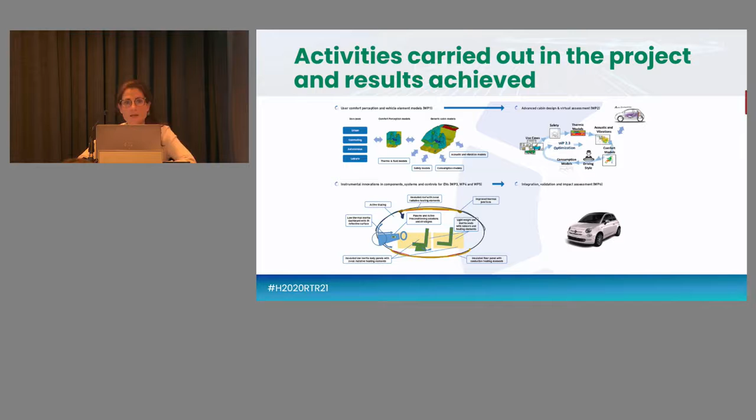So this is just a general overview of the structure of the project. The first line of the project was more centered in the virtual arena. The first step that we took was to develop 3D and 1D models, as well as safety, consumption, and comfort models in order to integrate them all in a virtual environment and be able to come up with different cabin designs, and also to evaluate these interventions in terms of comfort, safety, and energy efficiency. The second line that you can see on the bottom of the slide was more focused on a physical environment. We actually designed, built, prototyped, and integrated different hardware components into a Fiat 500e.

So let me show you a video of one of the first tangible results we got for this project, and it has to do with a physical virtual mock-up in full scale that we did during the project. So, let's play.

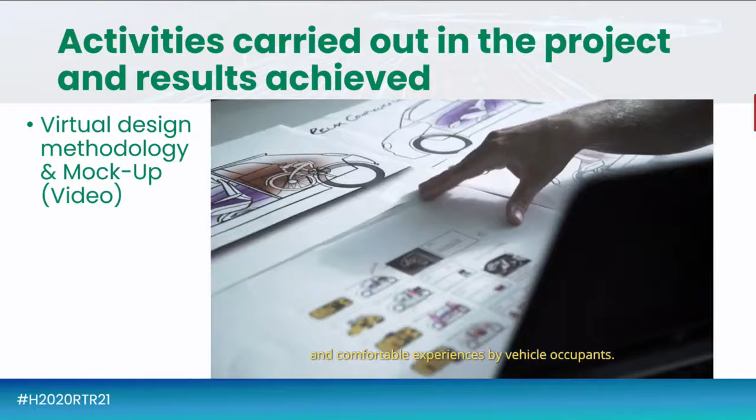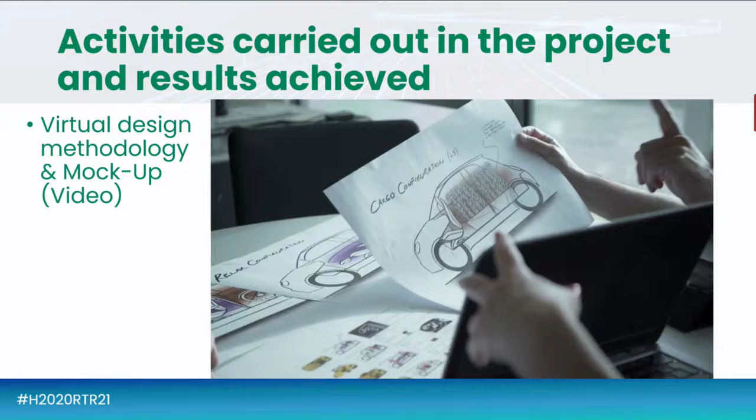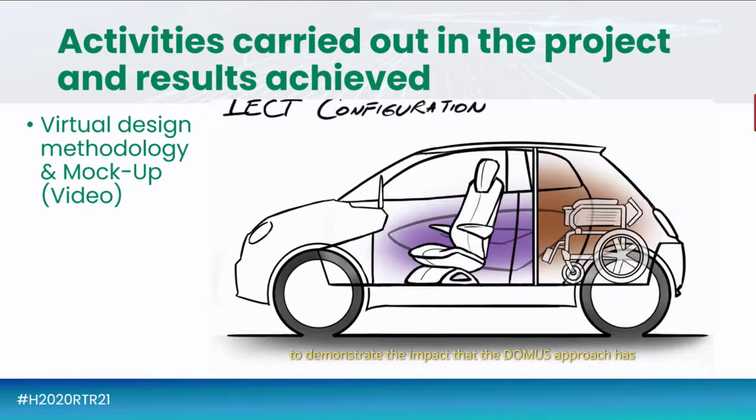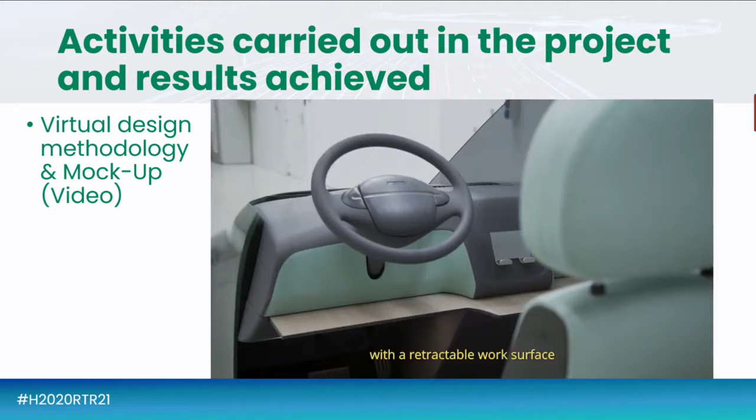Current electric vehicle cabin designs are usually derived from conventional combustion engine vehicles that, having the engine as an abundant source of heat, have not been optimized in a way which enables electric vehicle efficiency demands to be met. DOMUS aims to generate designs of radically innovative, user-centric electric vehicle cabins that could help achieve such sustainability goals while achieving effective, safe, and comfortable experiences for vehicle occupants. As a result, 3 different cabin designs were conceptualized where DOMUS innovative elements were combined with key innovative design modifications. The DOMUS consortium decided to make a mock-up of one of these cabin designs in order to show, in full scale, the results of the design process, to demonstrate the impact that the DOMUS approach has on electric vehicle cabin shapes and layouts when the criteria of energy efficiency and user needs are placed in the center of the process. To this purpose, the vehicle is conceived as being equipped with autonomous driving features, which allow the passenger to either work or rest during the trip. The mock-up was equipped with a single reclining seat with a retractable work surface to accommodate a tablet or a laptop, and the steering wheel itself is foldable, allowing for interior space modulation. The seat is designed to be lighter than customary, while granting a high passive safety level in the reclined position.

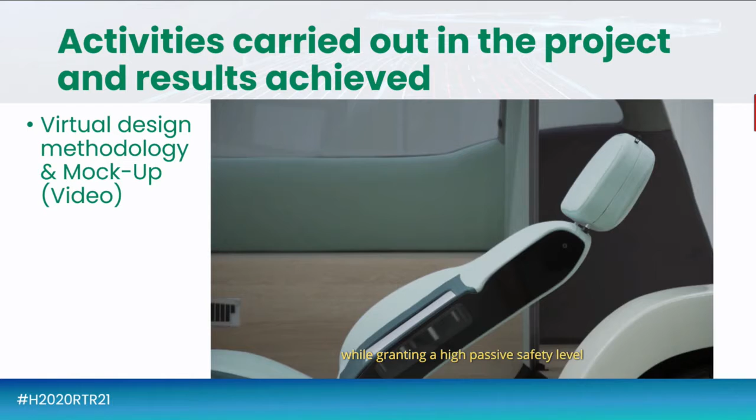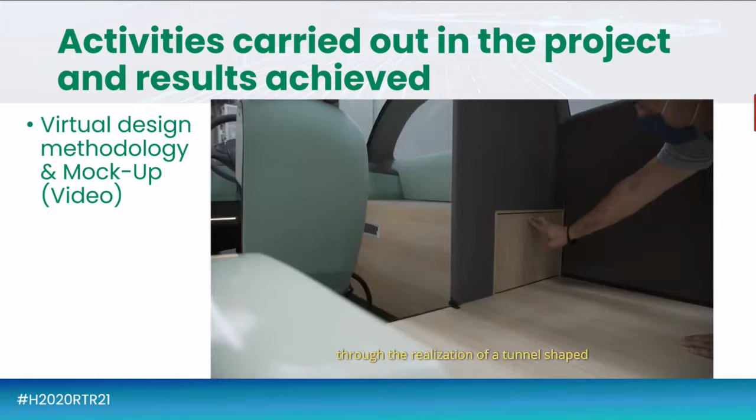A major contribution to the overall passenger compartment volume reduction is gained in a permanent way through the realization of a tunnel-shaped supplementary baggage compartment on the right front side cabin on one hand, and in a reversible way through a removable cabin partition comprised of insulating material on the other.

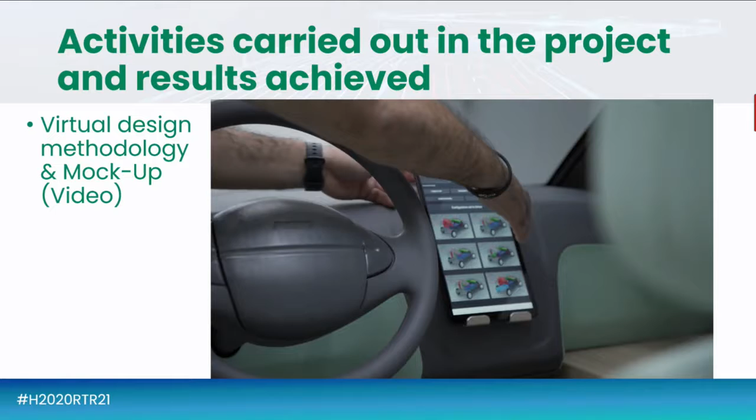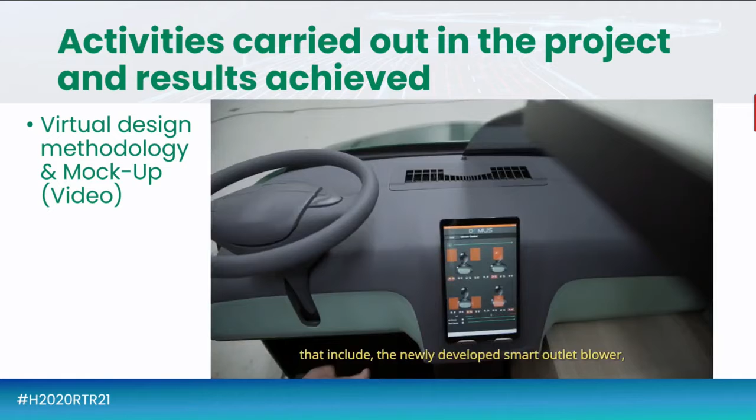Additionally, and to accompany this mock-up, an application was developed in order to control and trigger all the different cabin configurations in an easy, visual and intuitive interface. From this app, not only can the cabin configurations be controlled, but it also enables the user to activate all the climate control options that include the newly developed smart outlet blower and the radiant panels options inside the cabin.

The disruptive design changes of this model allow for a significant weight reduction of the full vehicle, thus contributing to one of the main goals of the DOMUS project.

So that was one video. I have another one. Another main result of this project that I would like to comment on was the result of the great collaboration between Virtual Vehicle and Coventry University. And this main result is the integrated virtual demonstrator that we actually did for the Fiat 500e, the prototype.

What we did for this result is to use the simulation results from a 1D model of the HVAC system and the CFD transient simulation results for the cabin of the baseline vehicle and the cabin with the innovations. And we use a linear regression as machine learning approach to create a fast simulator of the HVAC system and the cabins. They were all integrated in a closed loop that allowed to actually test a simplified control.

Afterwards, the next step that we took was to develop a reinforcement learning controller based also on machine learning. And this controller was used to optimize the performance of the DOMUS cabin in terms of an assessment framework. The assessment framework was a fitness function that we developed at the beginning of the project that considers elements such as comfort, safety, and energy to balance the operation of the cabin.

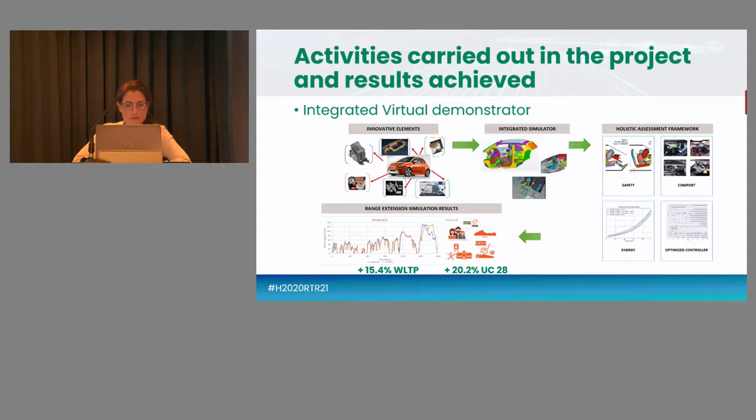And when we ran the simulation considering the WLTP conditions, we were able to increase the driving range of the demo vehicle by 15%. It was also demonstrated that the reinforcement learning controller, based on machine learning approach, performed better than the simple hand-coded controller.

So as I mentioned before, we had a physical, tangible result for this project, which is a demo vehicle in which we integrate all the hardware and software innovations. And I would like to share with you again the last video in which you can actually see the demonstrator.

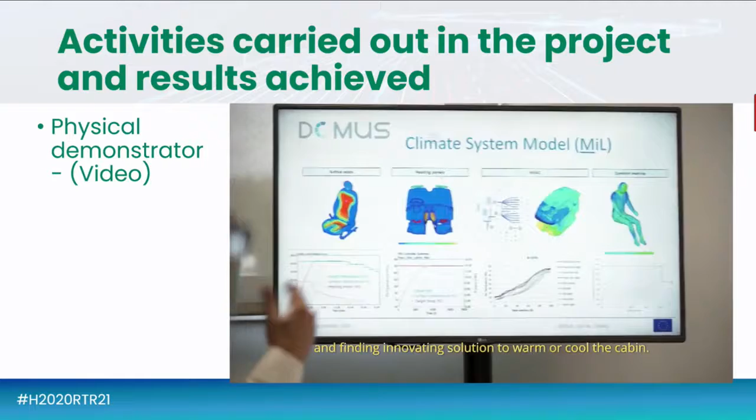Range anxiety is one of the main barriers to electric vehicle adoption by the broader customer pool. DOMUS aims to deliver advanced solutions to significantly lower the energy demand for cabin conditioning by reducing the thermal losses of the cabin, the weight of the car, and finding innovative solutions to warm or cool the cabin. All the innovations developed during the DOMUS project will be integrated in a demo prototype vehicle that will allow the validation of the technologies developed.

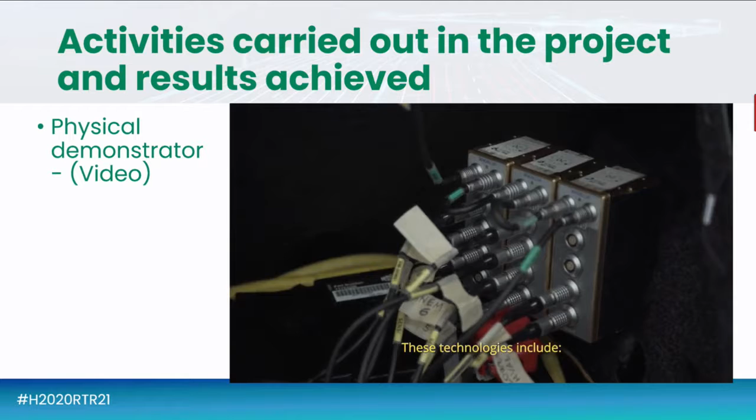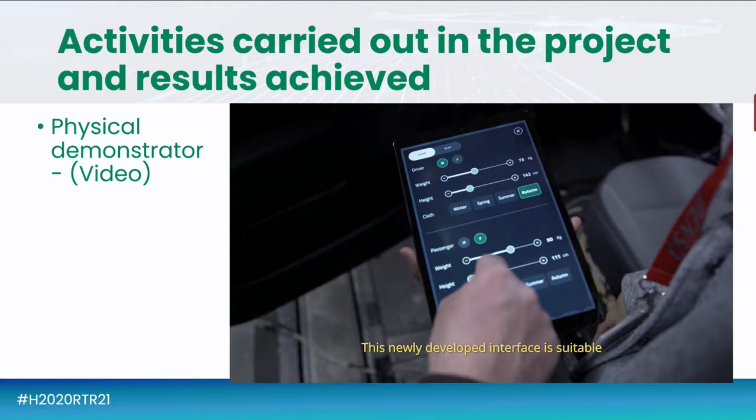These technologies include: Dashboard. The dashboard top cover was modified from the original baseline by changing the materials used in order to reduce the weight. The design was also changed in order to accommodate the human-machine interface developed for the DOMUS project. This newly developed interface is suitable for the operation of the systems, and it displays each component, allowing for an easy, intuitive, and precise control of all the elements.

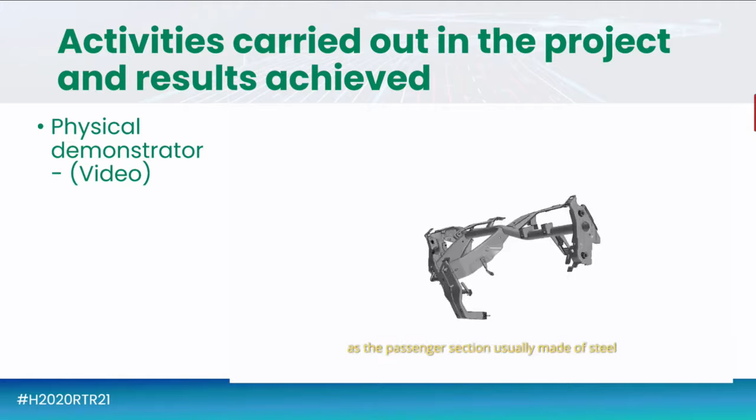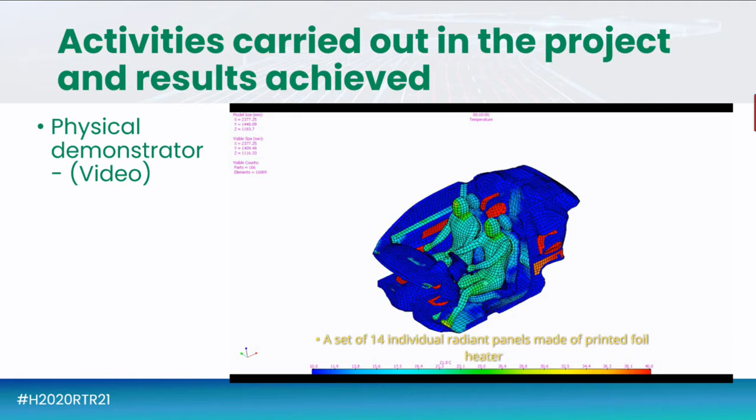The design of the cross-car beam was also modified, as the passenger section, usually made of steel, was substituted with a lightweight material. Radiant panels. A set of 14 individual radiant panels made of printed foil heater have been integrated in the interior components of the vehicle. Active seats. The entire weight of the seat has been reduced by building a high-strength steel frame, low-density foam, and new trim cover material.

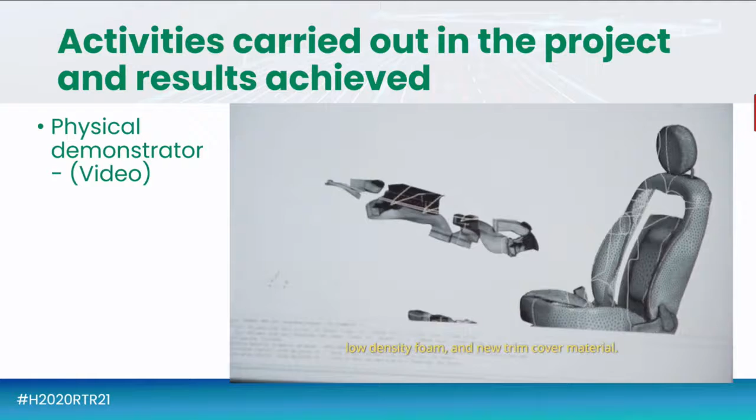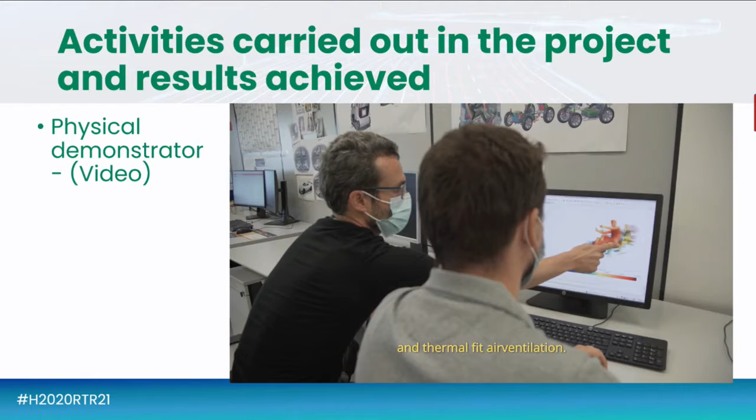There is a heating mat in the cushion and backrest of the front row seats, and a radiant back panel in the passenger and driver seat. Also integrated is a cooling system, consisting of a lightweight fan and thermal fit air ventilation. HVAC unit. The HVAC has been completely redesigned in order to decrease its size and weight, and also to reduce its energy consumption.

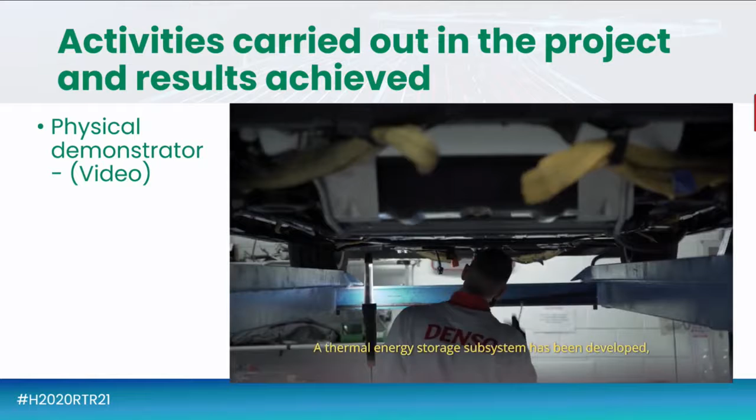TES, Thermal Energy Storage. A thermal energy storage subsystem has been developed. With it, otherwise wasted thermal energy can be captured and stored. This energy can then be used to heat up the cabin.

Insulation panels. The insulating panels were made with phase-changing materials and super insulation materials based on vacuum technology that exhibit very low thermal conductivity and a low density.

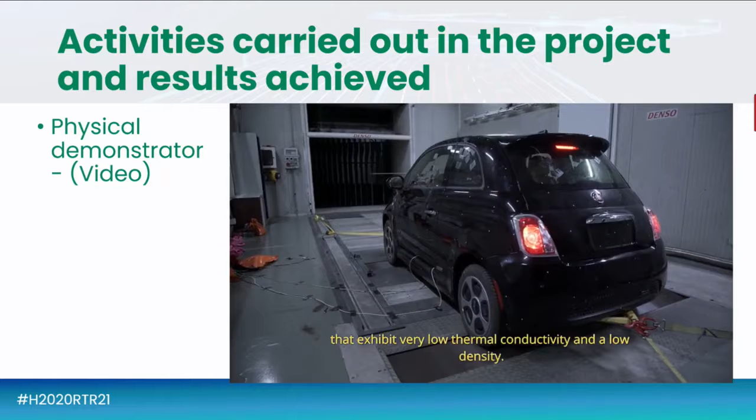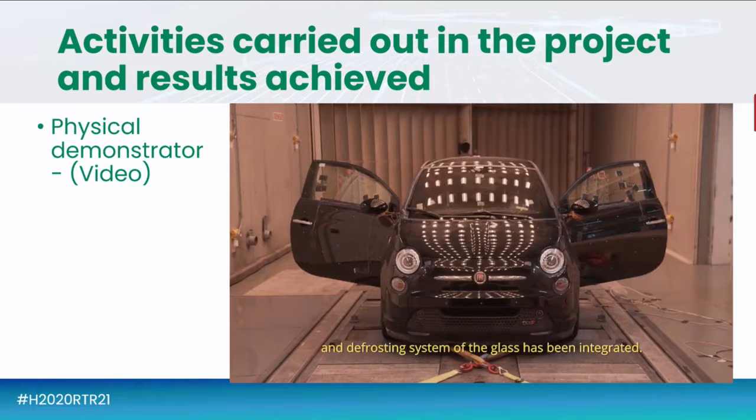Glazing. All glazed surfaces, windshield, rear window and door windows are fitted with electrical heaters and coated with a sun-reflective layer, and an efficient defogging and defrosting system of the glass has been integrated.

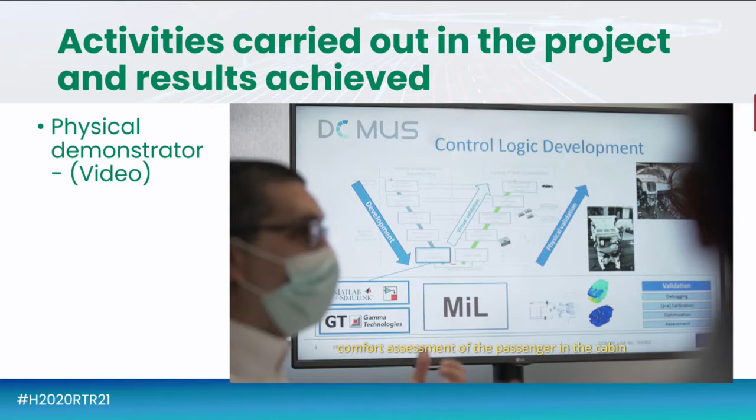Automatic control logic. In order to unleash the full energy-saving potential of these new active components implemented in DOMUS, the project introduces an automatic control logic capable of performing a real-time perceived comfort assessment of the passenger in the cabin and responding by determining the most energy-efficient combination of actuation parameters to all active components in the cabin.

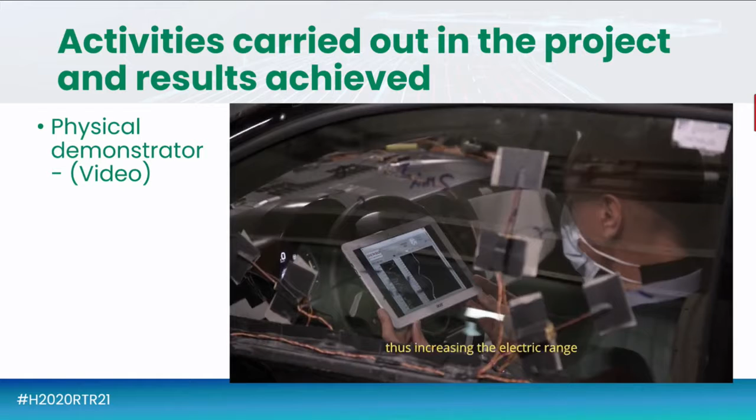All this research and innovations will help DOMUS achieve its main objective of reducing the overall energy consumption of future electric vehicles, thus increasing the electric range in different climatic conditions, while maintaining comfort and ensuring safety.

So once the integration of all these components was completed, we performed testing and validation of the demo vehicle, and we did 3 different types of tests. The first one was acoustic testing, then we also performed WLTP testing in order to assess the energy consumption. We did it at -10, 14 degrees and 35, and we also performed subjective testing.

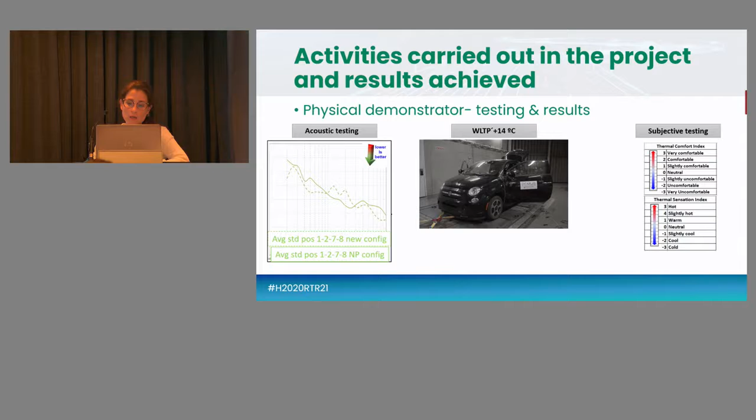So the results of the acoustic testing: we placed a noise source in the side of the car, and in the roof, and also we placed microphones inside of the cabin in order to measure the acoustic intrusion. And in general, what you can see with the discontinuous line is the new configuration of the Fiat 500, that is the DOMUS demo vehicle. In general, the performance was better in the demo car, and that is mainly thanks to the insulation panels created and integrated by Hutchinson. That is another result for another acoustic testing.

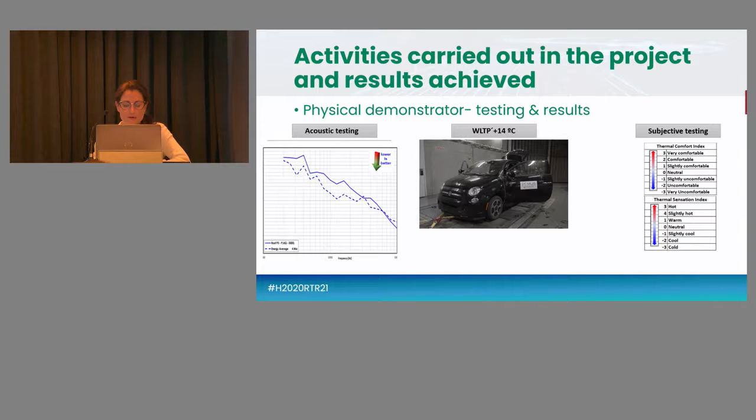These are the best results that we got regarding the driving range, which again was the main objective of the project, to reduce the energy consumption of the cabin in order to increase the duration of the battery and the driving range. So the best result that we got was at the WLTP at 14 degrees, and we increased almost 10% of the driving range, comparing the demo car with the baseline. We did so with a similar thermal comfort. For thermal comfort in this context, we measured the air temperature in the baseline and in the demo on the passenger side, and they were all the same.

Regarding acoustic comfort, we say it's a higher comfort because apart from the insulation being better, as I previously mentioned, also the blower and the compressor work less or at a lower speed. So we can imagine the comfort in terms of noise was better.

Safety and visibility: there was no windshield fogging in the demo car in the testing, and we also have a CO2 sensor implemented in the demo car in order to be able to activate as much as possible the recirculation mode, which of course saves a lot of energy. And the limit that we put in terms of safety was 2,500 ppm, and it never reached that limit.

We also performed subjective testing, and what we did is to measure the thermal comfort and the thermal sensation of the demo car in the street with a warm-up test, and we performed two tests, one with the radiant panels activated and the other one without the radiant panels. We had 8 different participants, and the result was that in general the thermal comfort and sensation was reached faster and during longer time when the radiant panels were activated in the warm-up.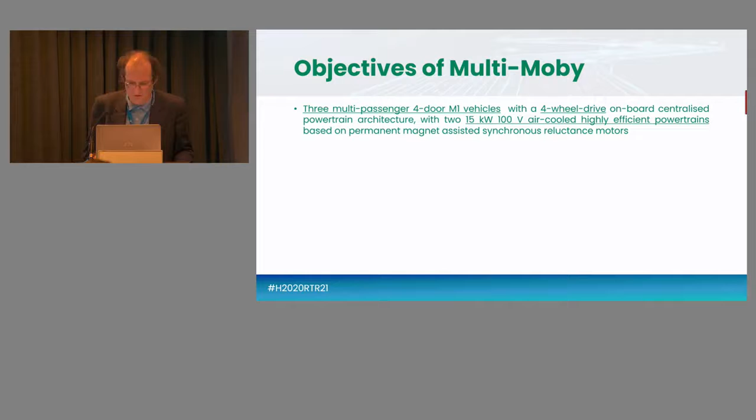So the motors are part of the so-called sprung mass of the vehicle, with 2 15 kilowatt, 100 volt, air-cooled, highly efficient powertrains that are based on permanent magnet-assisted synchronous reluctance motors, so with low content of rare earth materials. And then, to complete the fleet, we have 3 multipurpose vans, in particular an L7e-CU prototype, which is also 4-wheel drive, with 2 7.5 kilowatt 48 volt air-cooled powertrains and a low-cost belt-based transmission system.

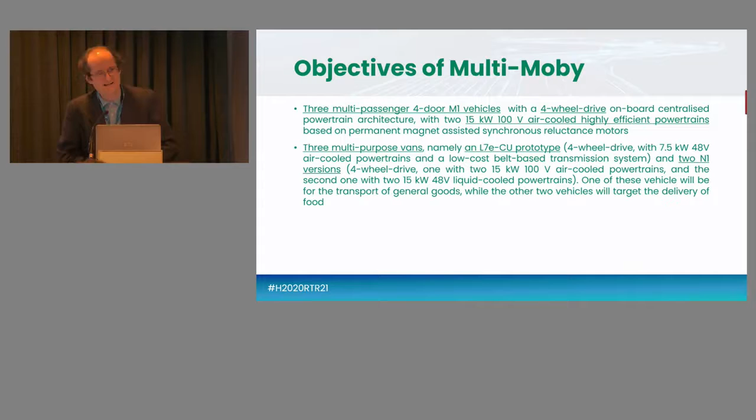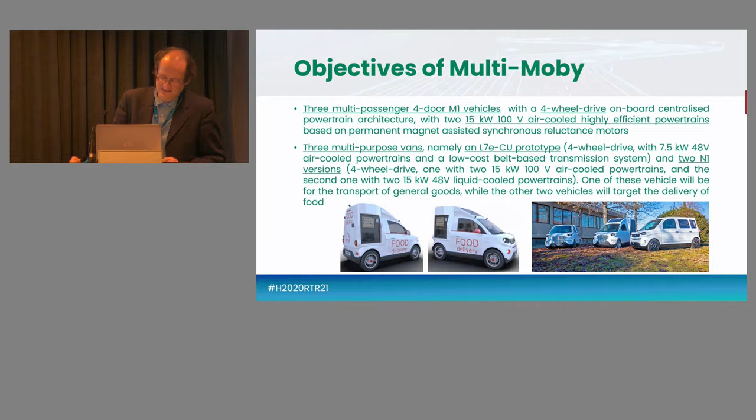And 2 N1 versions, again 4-wheel drive, one with 2 15 kilowatt 100 volt air-cooled powertrains, and the second one with 2 15 kilowatt 48 volt liquid-cooled powertrains. One of these multi-purpose vans targets the transportation of general goods, while the other 2 vehicles will target the delivery of food. And here we can see 2 rendering pictures that were included at the submission time of the project proposal, but we can see here a photograph of the current generation of the electric vehicle prototypes of Multi-Moby.

Multi-Moby covers a lot of areas that are required for systems integration at the vehicle level. In particular, Multi-Moby includes electric powertrain optimization. In this area, we have a continuation of the activities that started in the previous European project TELL. As I said, there is the development of a 100-volt powertrain by Dana TM4 and two 48-volt powertrains by Valeo Powertrain Systems. And the development process of the electric powertrains is based on simulations, digital twinning, optimization.

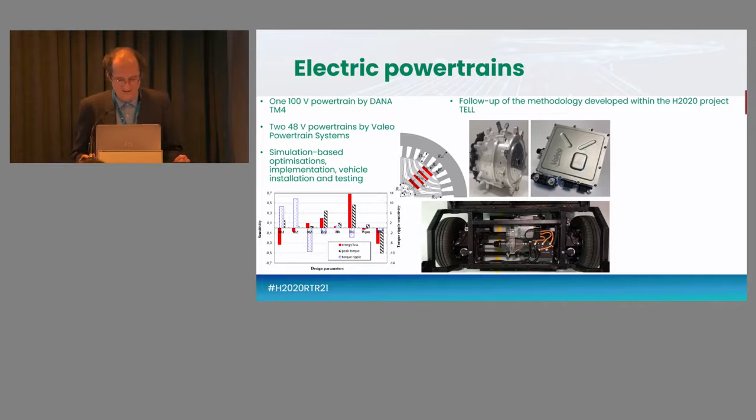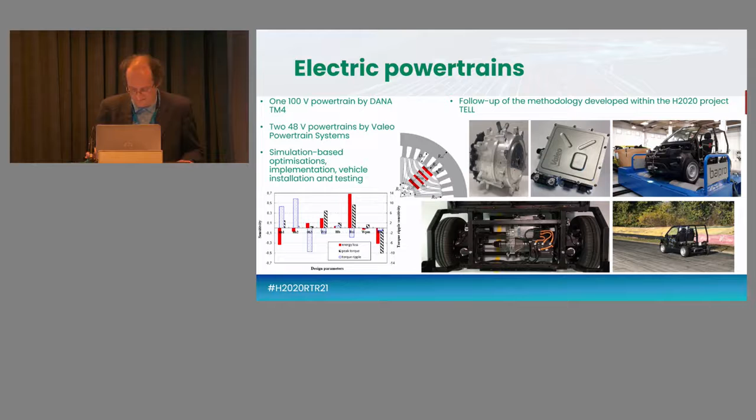So this virtual process of optimization of the components is followed by implementation of the hardware, installation on the vehicle demonstrators, and finally testing. So here we can see some of the pictures of the prototype components that have been provided by the relevant participants. We can also observe a preliminary installation of one of the electric powertrains on an initial prototype of the electric vehicles by IFEVS. And then we can see, for example, a picture of a preliminary testing session on the rolling road facility at IFEVS of the so-called mule vehicle, that is a preliminary version of the demonstrator vehicle, and this activity also involves some form of testing on tracks or proving grounds.

Another very important aspect of Multi-Moby is the enhancement of safety. Safety, first of all, in terms of passive safety. This aspect has been dealt with, in particular, by the participant CIDAUT. CIDAUT have designed, together with IFEVS, a high-strength steel structure combining low cost with high energy absorption capability and stiffness. This is a follow-up of a previous FP7 project called PLUS-MOBY. And in this steel structure of the chassis, different products of the dual-phase steel family are combined. And the activity consists of finite element analysis, including physical crash tests at the CIDAUT facility.

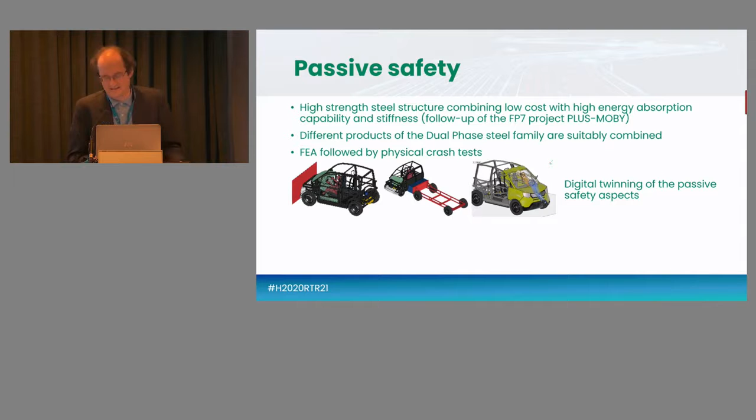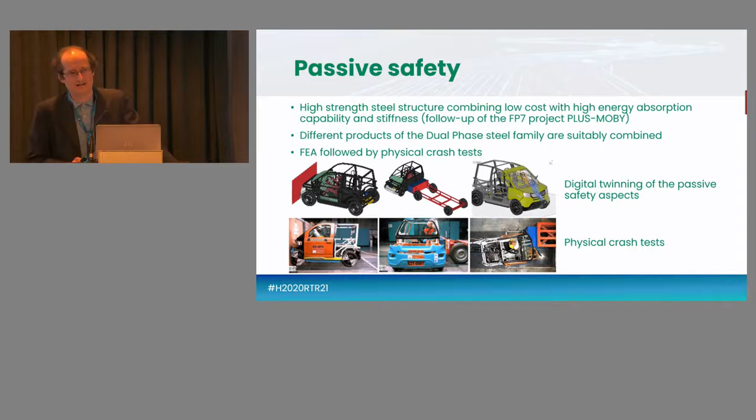So here I have included some of the pictures of the models that have been used within the structural optimization of the chassis. And then, at the end of 2021, also some pictures of the physical crash tests that were carried out at the CIDAUT facilities in Spain.

I have discussed passive safety. Another essential aspect in light electric vehicles is active safety. Differently from other projects where the approach is to target high segment vehicles characterized by very complex as well as expensive chassis actuation systems, in this specific project, as low cost is an essential point, we are trying to implement smart solutions that do not imply significant additional hardware cost for enhancing active safety. One example, among various others, is the preemptive trail braking control function.

So the basic fact is that nowadays, if we have a car with a conventional stability control system, the control system is a reactive system. So if a driver approaches a corner at excessively high speed, the stability control system, once the vehicle tends to become unstable within the corner, tries to actuate the friction brakes individually in order to keep the so-called sideslip angle and the yaw rate of the vehicle under control.

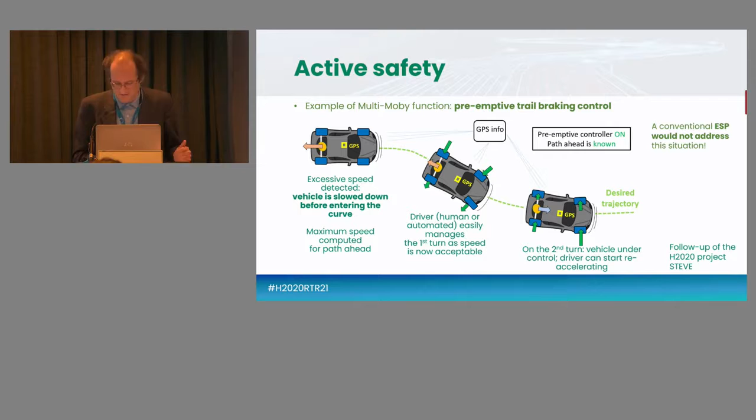In Multi-Moby, we try to implement a solution based on predictive control. So nowadays, through the GPS, through the navigation system, it is possible to know in advance what the future trajectory of the vehicle is likely to be. So it is possible through a preemptive controller to preemptively slow down the vehicle if the entry speed into a corner tends to be excessively high. So this is a rather simple functionality that, of course, implies some form of vehicle connectivity and predictive preemptive control, but this gives a functionality without additional hardware cost, a functionality that goes beyond the typical functionality of a conventional stability controller.

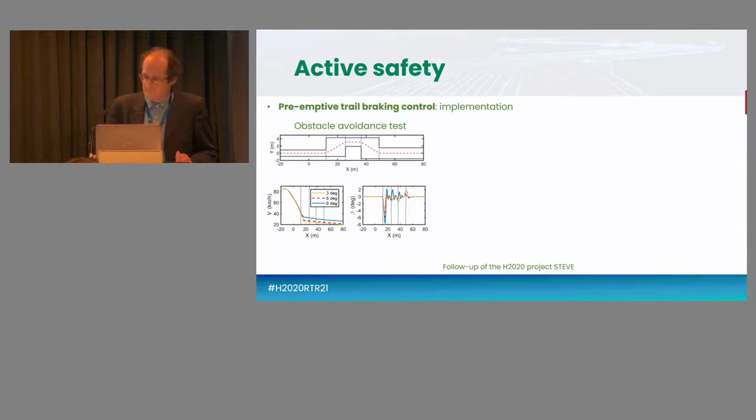And very interestingly, in the predictive controller that we have tested here, we have also imposed some constraints in terms of lateral dynamics. For example, in terms of maximum value of the so-called sideslip angle beta, that tells us how much the vehicle is sliding laterally during a corner. So essentially, we can achieve the same functionality of much more complex systems without having significantly complex actuation hardware.

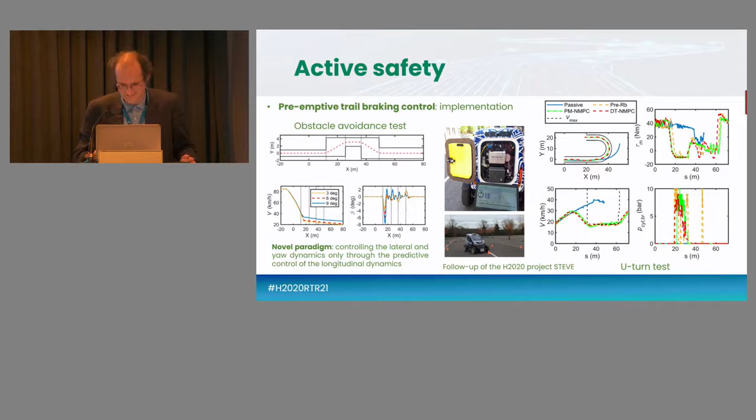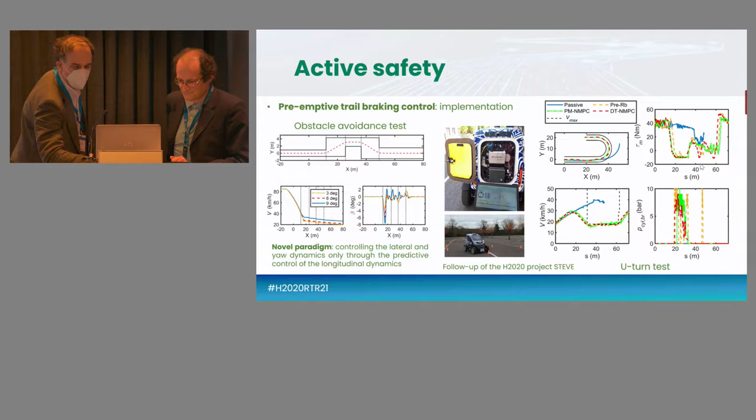Another example of the... presentation seems to be stuck. No, I don't have any video in this presentation. I don't know why. Hopefully.

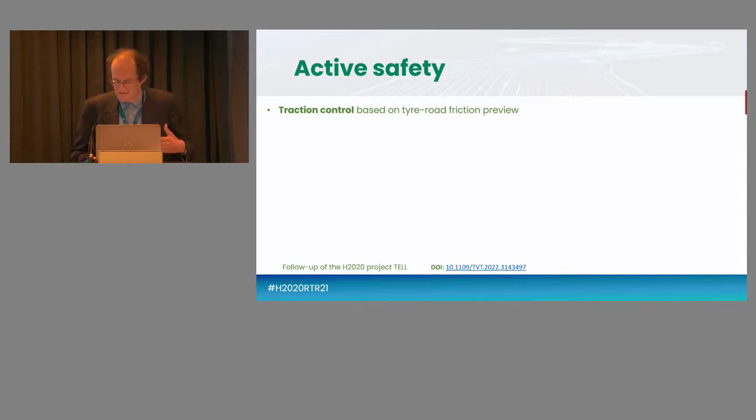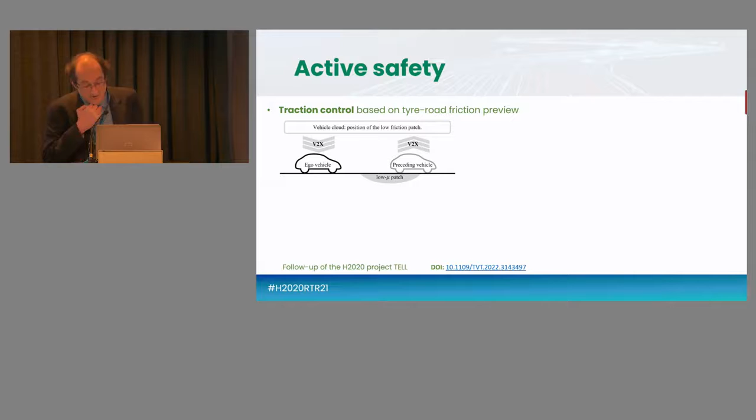Another example of a smart control function that has been developed within the project TELL, but now it is transferred to Multi-Moby, is the preemptive traction control function. So essentially the idea is that in future, thanks to vehicle connectivity, it will be possible to know in advance the presence of low friction patches on a road. So it is possible, for example, to pre-alert the traction control system regarding potential hazardous situations in terms of tire-road friction conditions.

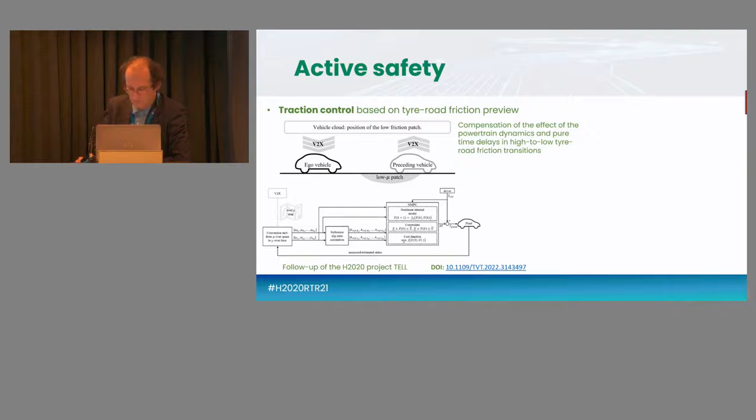So in TELL and then in Multi-Moby, we have implemented, first of all in simulation, and then also tested experimentally, a nonlinear model predictive controller that works under the assumption that we already know in advance the friction coefficient profile of the road in front of the vehicle. And as a consequence, we can change the reference slip ratio as well as the so-called prediction model of the model predictive controller that runs in real time on the vehicle in order to preempt these friction transition events.

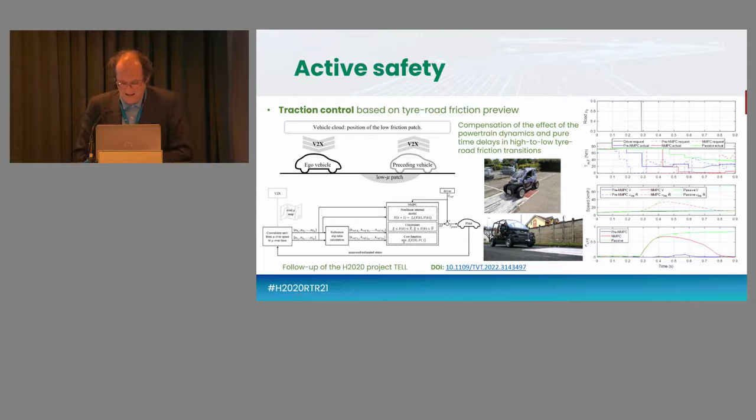And we have tested this functionality again, first of all, on a light electric vehicle in our car park. Then once the functionality was calibrated, we also transferred it to the Multi-Moby vehicle in IFEVS. And here we can see some plots of the experimental results where we have a comparison between the passive version of the vehicle, so without any traction controller.

In particular, I would suggest to have a look at the last plot that plots the so-called sigma x front right variable. So this is the so-called slip ratio of the front right tire. In particular, we can see that the passive vehicle has a significant wheel slip when we have the transition of road mu from high to low, whilst the vehicle with the so-called NMPC, that is a sort of conventional benchmarking

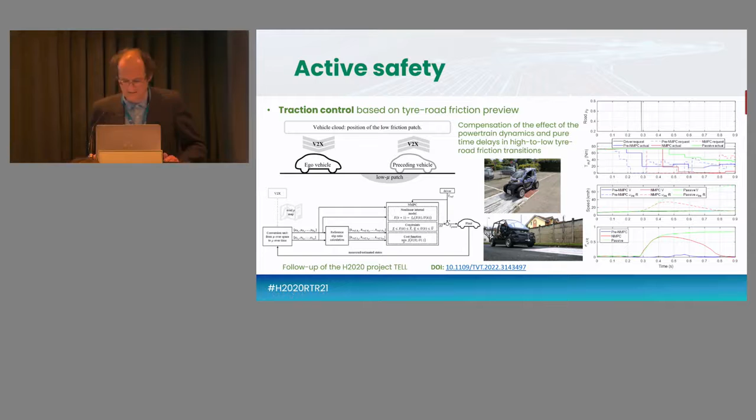traction controller, can manage to control the slip, but there is more or less half a second of time in which the controller cannot deal with it because of the delays of the electric powertrain, whilst with a preemptive controller that corresponds to the blue line called pre-NMPC, we have a preemptive compensation of the tire slip event with the consequential benefits in terms of longitudinal and especially lateral vehicle dynamics.

So these are only examples of the many functionalities and many items that are being tested and developed within Multi-Moby, because there is also a lot of work, for example, in the area of battery charging, in the area of hybrid energy storage that I haven't even mentioned.

In terms of impact, well, for sure there is a significant industrial impact in terms of vehicle safety, both in terms of passive and active safety. Multi-Moby will also implement in the second half of the project some form of driving automation function, but we are still in the process now working on those.

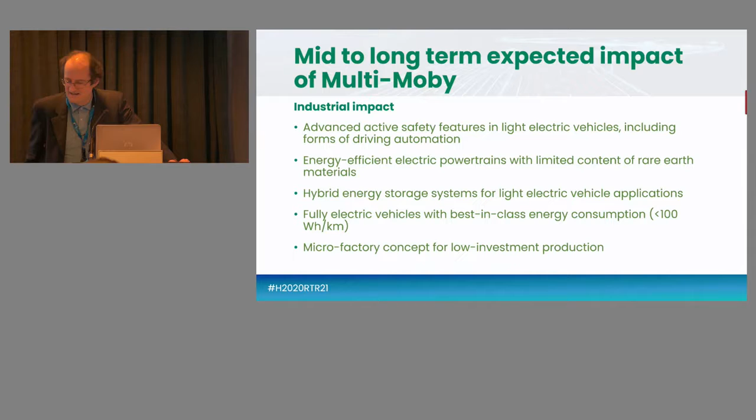Then we have impact in terms of energy efficient electric powertrains for 100 volt and 48 volt applications with limited content of rare earth materials, hybrid energy storage systems, and of course the vehicle level, simple but smart vehicles with best-in-class energy consumption characteristics. And last but not least, IFEVS, thanks to the background of previous European projects, is experimenting a microfactory concept for low investment localized production.

Finally, I would like to mention the fact that we try to generate also some academic impact, to have a long-term spread of our research in the academic community. For example, in the first project year, we have produced 3 journal papers.